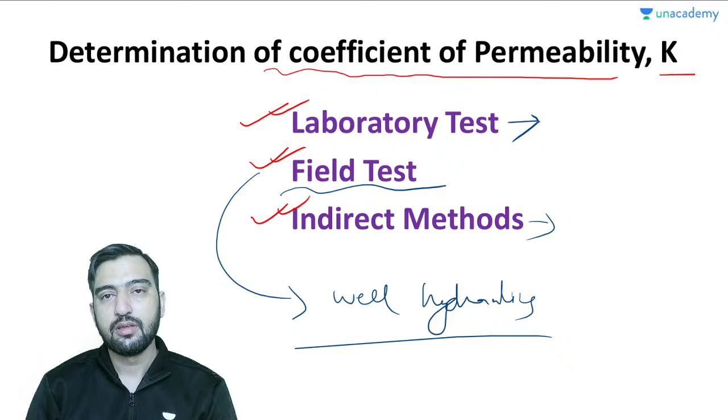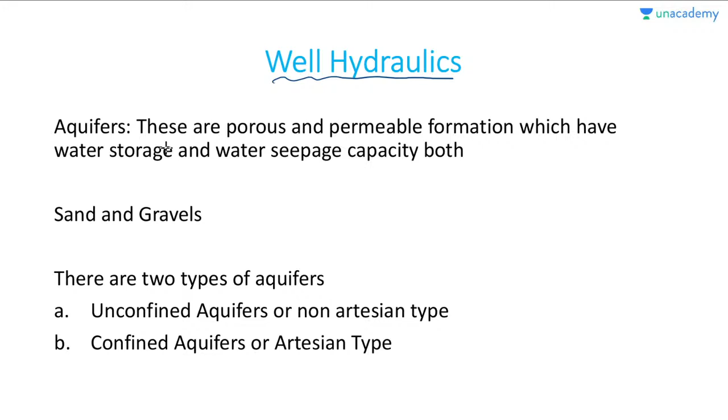So well hydraulics we were starting, and the very first definition we studied that day was aquifers. Aquifers are basically porous and permeable formations which have both water storage and water seepage capacity - permeable, so they can pass water, and porous. A best example of these are sand and gravel. There are two types of aquifer: unconfined and confined. Unconfined starts from the top and is not confined. Confined aquifer means the sand or gravel layer is sandwiched between two impermeable layers. In unconfined aquifer the pressure variation is hydrostatic, but in confined aquifer the pressure may be even higher than atmospheric pressure, higher than hydrostatic conditions.

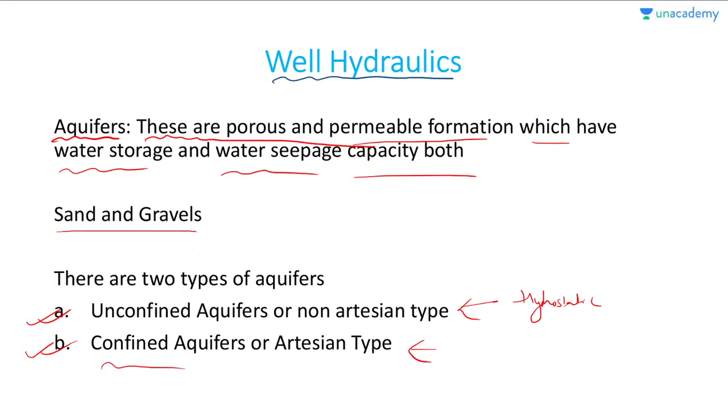Sir, can I ask a doubt? Yes David RK, of course, I am here for doubts only. Very good morning Shamala. Yes, you can ask your doubt dear, you can type it.

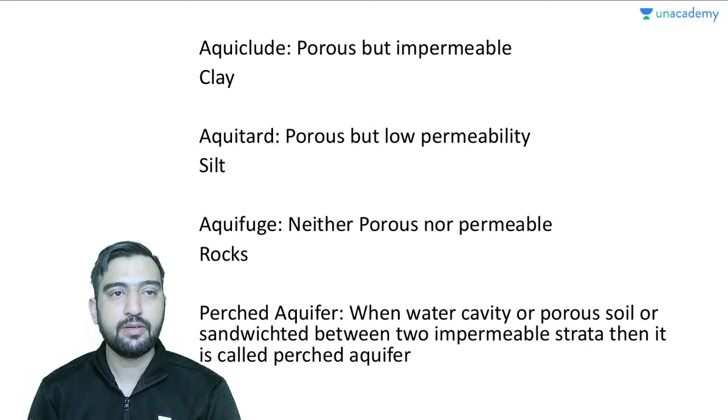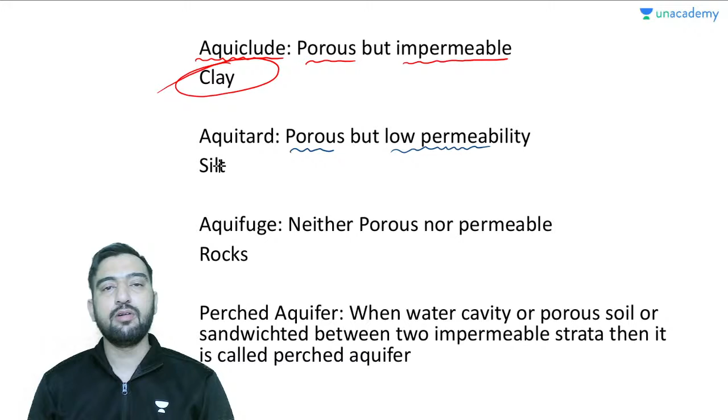Next I was saying aquiclude. What are aquicludes? Aquicludes are porous but impermeable, meaning they can retain water but will not be able to pass the water. An example is clay. Next is aquitard - aquitards can retain the water and pass the water but with very less velocity. Clay has very less velocity and silt also has less velocity, but still higher than that of clay. So for silt, the concept is very simple.

As you are increasing the particle size, your void ratio will be decreasing, but interconnectivity of the voids will be more. So permeability increases with the increase of size of the particles.

Porosity increases, you can say the soil water retention power increases with decreasing size of the particle. As we know, the sizes of clay materials are even less than 2 micron, so definitely they are going to have very large void ratio, but interconnectivity of those voids will not be there. So that is the reason why clay is considered as porous but impermeable.

Relatively, the size of silt particles is higher, up to 75 micron, so relatively they are higher than that of clay. So it's having porosity, but porosity-wise it is lesser than clay. Permeability-wise, it is greater than clay.

Aquifuge, they are rocks only, because they are neither porous nor permeable. And if we are talking about, okay, before that let me see what David is saying.

Sir, we want that void in the soil should be less, so the settlement will be less. On the other hand, in flocculated structure there are more voids but less settlement, so it is preferred.

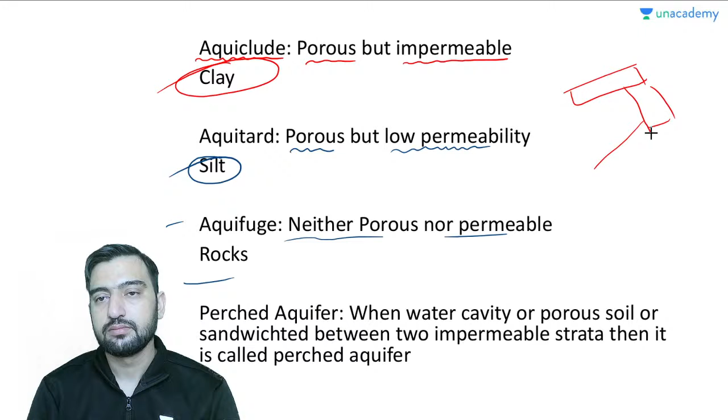Okay, so here void ratio is very high. No doubt void ratio is very high. So we do not prefer this flocculated structure. We prefer dispersed structure, dispersed soil. Okay, maybe you have studied this somewhere.

Can't say less void means less settlement? No, less void means less settlement, obviously. But most of the time, your first statement is right.

We are going to use only that soil which is having low void ratio, because low void ratio is really very good stuff for construction point of view, because settlement is less, so the ability of water to flow beneath that is also less. But it is having only one drawback, that the amount of water which is already entrapped there is going to take really long time to settle down.

Okay, but which is the reference where we have seen that you are preferring flocculated structure? Flocculated structures are good in only one thing: they are having their initial, you can say, stress very high in order to break this flocculated structure into dispersed structure.

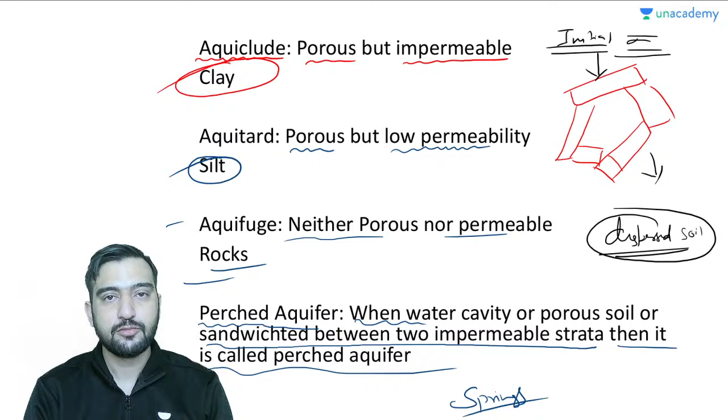Okay. Study the thing, what is the specific yield now. So till there we have seen what is the specific yield. Tell me, anybody, what is the specific yield?

Yield means, by definition, the ratio of volume of water which will flow under gravity from the saturated soil mass to the total volume of the aquifer. It means how much percentage of water can actually be transferred from a given soil sample. That is known as specific yield.

Yield means extraction power, exactly. So the ratio of volume of water which will flow under gravity from the saturated soil mass to the total volume of aquifer is known as the specific yield. You can say it is the volume of water which can be drawn under gravity with respect to total volume of the soil, expressed in percentage.

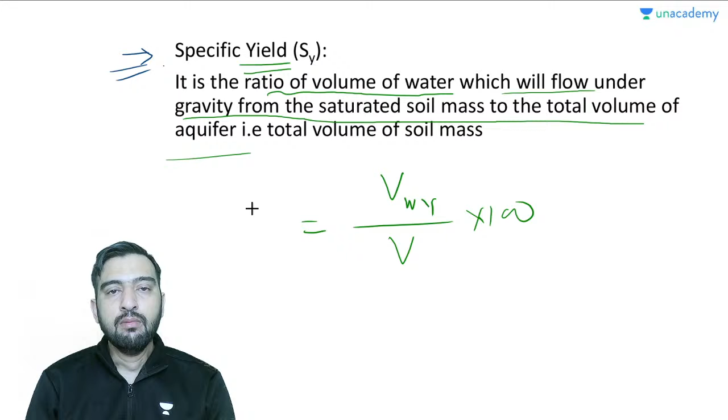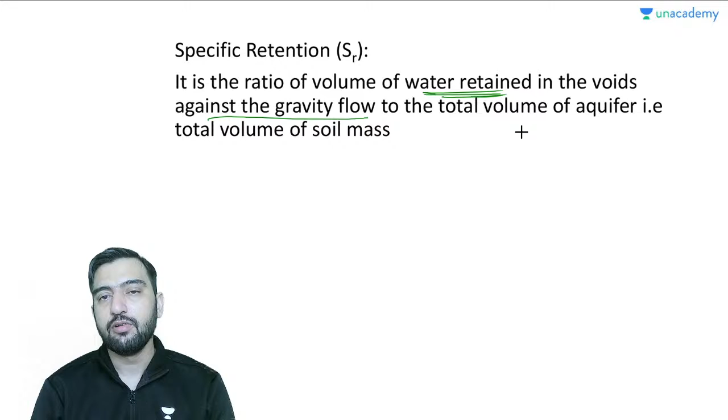What can be the complementary thing to this? It can be the specific retention. That is the volume of water which is not flowing, which is retained in the voids against gravity flow, with respect to the total volume of the aquifer or total volume of the soil mass. This is known as specific retention.

So your specific retention is equal to VWR over V into 100.

So one thing you can observe, sir, is yield due to gravity or due to external applied force like bore wells or other processes.

Actually, in definition it is gravity only. But one thing is sure: if specific yield of a soil is good, then due to boreholes, external tube wells or pumping, it is also going to be more, because gravity simply acts with its own force with the help of the gravity component. If that yielding is more, then indirectly, whenever you do any pumping, still the yield would be higher. But in definition, specific yield only includes due to gravity. However, it is also true that if specific yield due to gravity is high, then automatically its water extraction capacity will also be high.

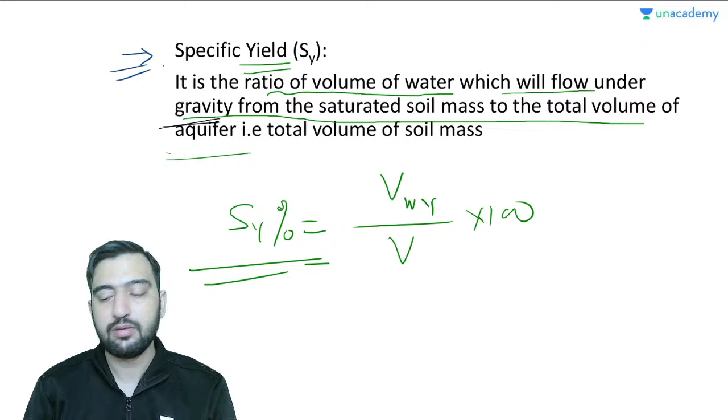So one observation I can draw from here: if I add total yield plus total retention, it is volume of water yielded plus volume of water retained, upon total volume. So whatever water has been flowing and whatever water has been retained, together they are covering what volume?

So if you add your yield and retention, in percentage, it is going to be equal to the porosity. Tell me if I am right or not. Then total it is going to be equal to porosity percentage.

Because, see, whatever water is flowing and whatever water is retained for a saturated condition, that is nothing but the volume of void, and we know that volume of void with respect to total volume is nothing but the porosity. So in percentage it is porosity. Is it clear?

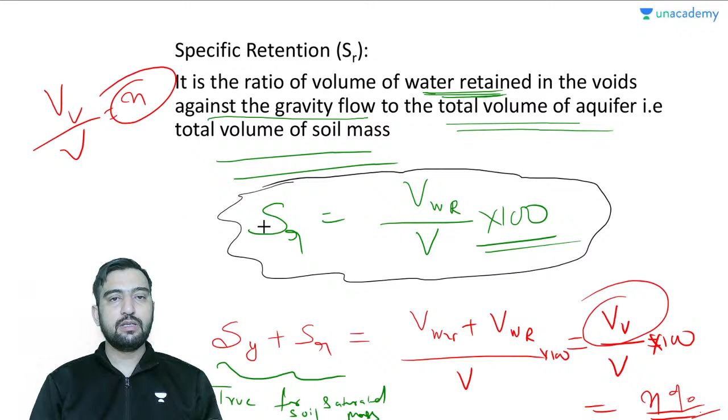Okay, now see the next one: storage coefficient. What is storage coefficient? It is simply the volume of water in a confined aquifer which is released per unit surface area and per unit change in head. So once again, the amount of water which can be extracted per unit surface area and per unit change in head is known as your storage coefficient. Is it clear? Definition is important, and the symbol for this is capital A.

Storage coefficient symbol is given by capital A. And on field, how can we find the storage coefficient? We can obtain it at field by pumping test, that too in confined aquifer. Pumping test in confined aquifer. So by that, you guys can get the storage coefficient.

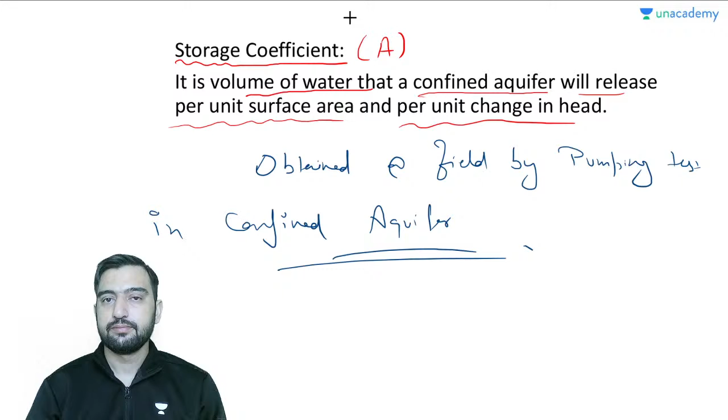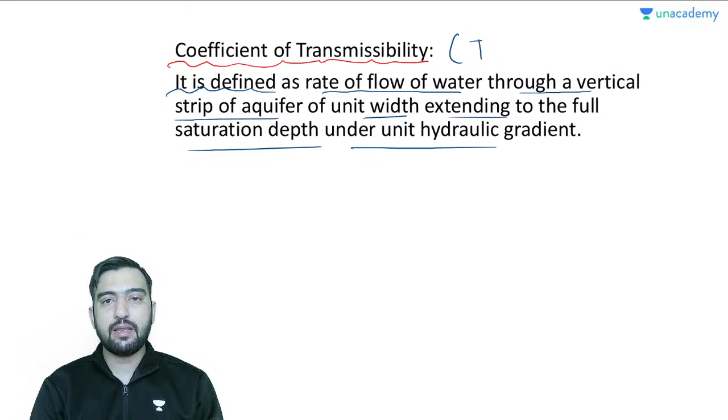Okay, let's move to next: coefficient of transmissibility. It is defined as the rate of flow of water through a vertical strip of aquifer of unit width, extending to full saturated depth, under unit hydraulic gradient. In simple language, coefficient of transmissibility, denoted by T, is simply your hydraulic conductivity or coefficient of permeability multiplied by the height.

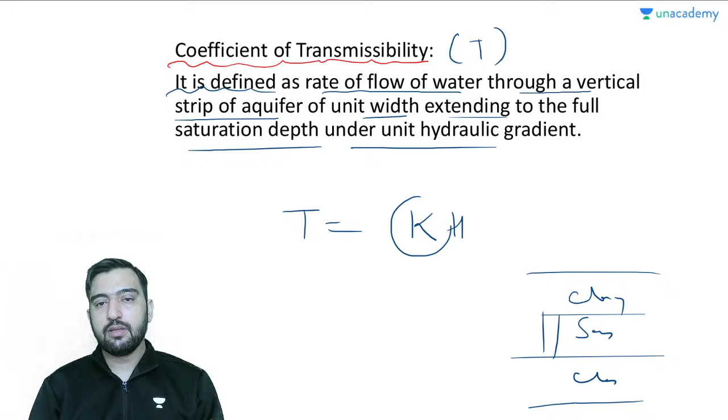For example, if this is my clay and sand, suppose it is my aquifer, so this K value, whenever you are multiplying it with this B, then this is known as your coefficient of transmissibility. So simply you can say that on multiplying your coefficient of permeability with the height or depth of the layer, you will be getting your T value, coefficient of transmissibility.

And here my dear friend, B or you can say H is going to be the depth or height of the aquifer. So it's very easy to find. All we have to calculate is the K value, and after that we have to simply multiply that K value with our B. Is it clear? So once again I am reading the definition. It is defined as the rate of flow of water through a vertical strip of unit width extending to full saturation depth under unit hydraulic gradient. Okay, so that is the case.

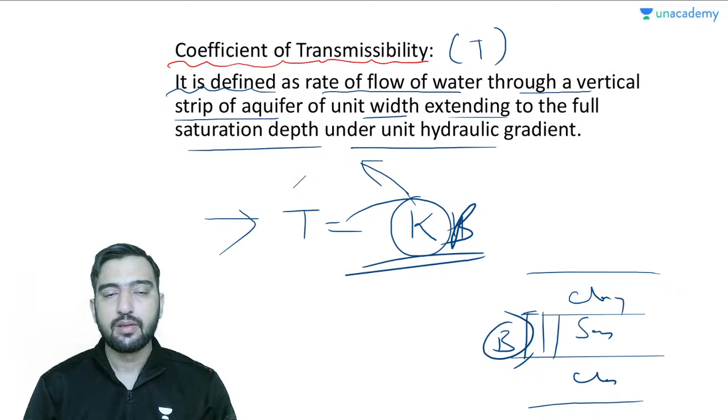Now it's time to calculate all these stuffs one by one. So it's analysis of unconfined aquifer. As I have told you in the previous class and today's class also, there are two types of aquifer: unconfined and confined. In an unconfined aquifer, you cannot say anything about the confinement, you cannot say about the depth.

But in a confined aquifer, your sand or gravel layer, your aquifer, is simply sandwiched between two aquicludes or two impermeable layers, and its depth is fixed and confinement is there. So there are two theories for these analyses, for unconfined as well as for confined. One is Theim's theory and one is Dupuit's theory. We will be studying Theim's theory, and we will be able to observe that Dupuit's theory is nothing but a special case of Theim's theory, or you can say Theim's theory is the more advanced version of the analysis. Doesn't matter whether it is a case of unconfined aquifer or confined aquifer.

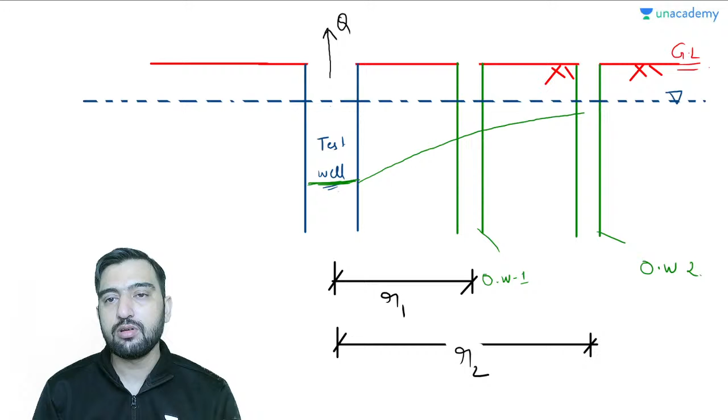Now what will happen? A drawdown curve will be established, on this side as well as that side; it would be symmetrical, obviously. So due to this pumping, the water level in both of these observation wells would be lowered, isn't it? So there are certain assumptions before I actually start the analysis. What are those assumptions? First of all, we will see that.

The first assumption is that the test well penetrates the entire thickness of the aquifer. That is, no flow from the base of the well and flow is radial. Although this aquifer is unconfined, so its thickness is going to be very deep. And if it is very deep, then water may enter my well from here, and since it is an unconfined aquifer and the well is only of limited extent, water may also be entering from the bottom.

This is the reality. But Theim said we are assuming that where our well has stopped, that is also the end of the aquifer, meaning water is not going to come from below. In short, Theim said that water flow would be only radial, not from the base. So he has simply ignored this water coming from below. As per his analysis, only radial flow is going to be considered.

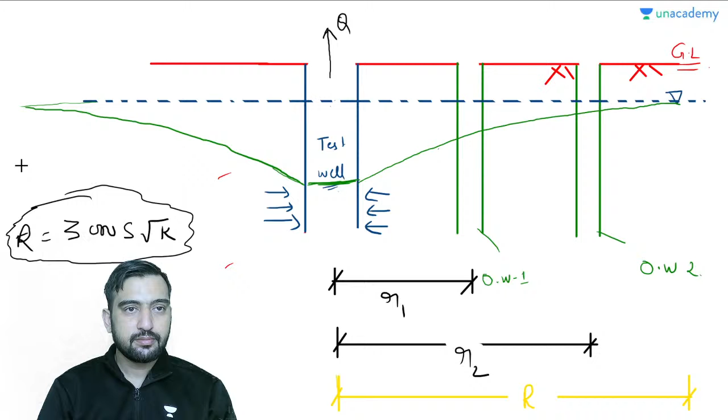But it is an empirical equation. It is given by Sichardt. So let me write. It is Sichardt's equation, where K is the coefficient of permeability in meter per second, and S is the drawdown. And this R is the radius of influence.

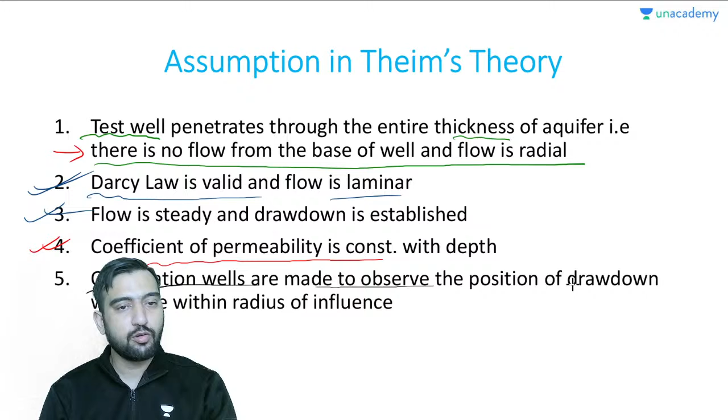I hope till here everything is clear. R is known as the radius of influence. So these two observation wells are made to observe the position of drawdown, which must lie within the radius of influence, because beyond the radius of influence, drawdown would not be established. See, this is drawdown at observation well 1. This is drawdown at observation well 2.

Okay, I am hiding this. So see this. Observation wells are made to observe the position of drawdown which lies within the radius of influence. I noticed in my device that I was blocking the statement, so that's why I have now removed myself. Okay, great. So you can see it. So see now.

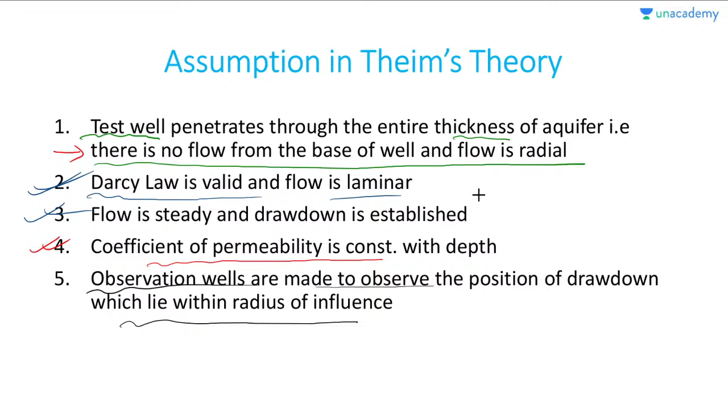So here it is the maximum drawdown, because from here you are pumping the water. This is your test well and this is your maximum drawdown. Let's say this is the drawdown in observation well number 1, S1. This is your drawdown here, S2. So this is R1, radius of observation well 1, and R2, radius of observation well 2, and this R is the radius of influence, the zone after which your initial water level is maintained.

Anyway, if you are going to take out water from a tube well or test well, it is going to influence the surrounding water only. Okay, so now you can see the water is coming from here. And if you are considering this thing, then here the water would be entering. See, it is just like your cylinder now.

See, this is your center, and this is going to be like this, and for water to come inside, you would be having these things. The same thing would happen radially. So if you have to consider the area which is actually available for flow to come in, that is nothing but the circumferential area of this cylinder, and not with full depth, but only up to the depth where you can find the water.

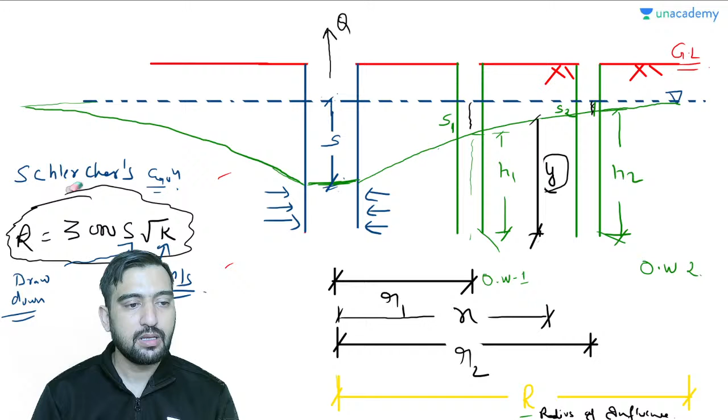Yeah, so you can always ask your doubt here.

So y be the height at any distance x. So what is the area which is available for inflow? It is 2 pi x into y. Tell me if I am wrong. What is 2 pi x? This is x and this is y. So this is a cylinder, so the circumferential area available at radial distance x would be 2 pi x into y. So from this much of area, water is going to come under the gravity flow.

After that we all know that Q is equal to KIA. This is nothing but Darcy's law. So Q is equal to K, I is dy by dx, and A. Our task is to determine this value. But before this, we can simply find the discharge for a small element. So Q is equal to K dy by dx, and the area is 2 pi x into y.

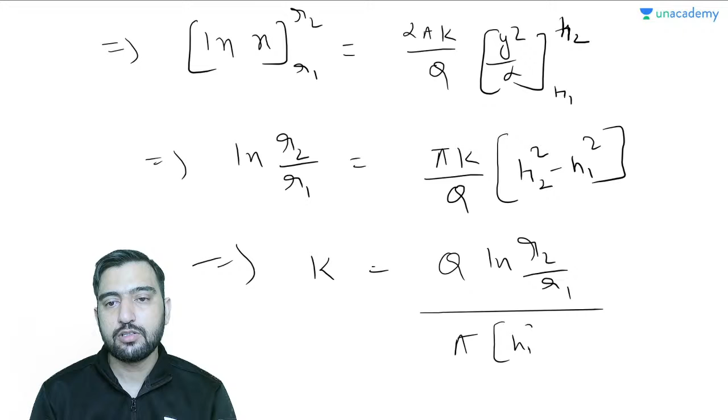So ln r2 over r1 is equal to pi K over Q into h2 square minus h1 square. So K is equal to Q ln r2 over r1 over pi into h2 square minus h1 square.

Is it clear? So this is the expression, or if you want to write it in log base 10, it is 2.303 Q log10 r2 over r1 divided by pi into h2 square minus h1 square. That's all. So that is going to be the concept. Let me write it here only, I'm just trying to increase the visibility.

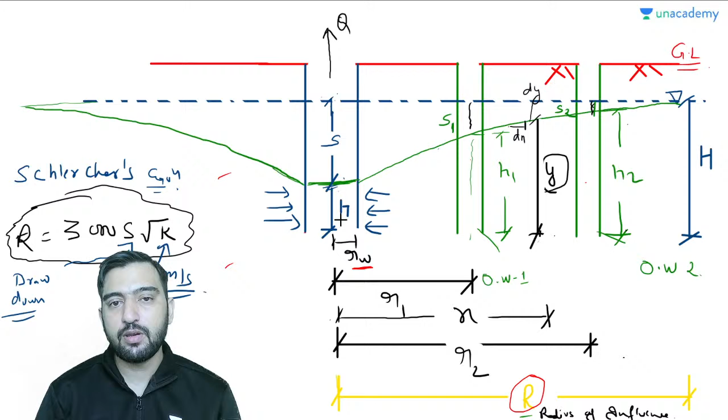And similarly, the Dupid formula is going to be K is equal to 2.303, same thing, Dupid is simply replacing R2 by capital R and R1 by radius of the well, upon 2 pi B into H minus small h. H minus small h is also known as your drawdown at the test well. Is it clear?

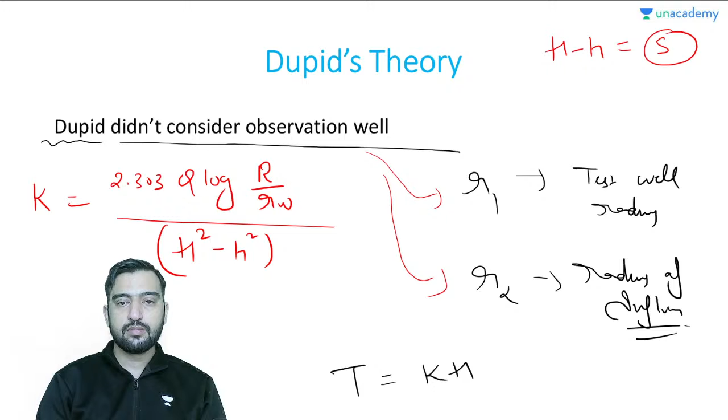So transmissibility you guys can also find. If K is known to you, transmissibility is simply equal to K times H, or you can say K times B. And here as well, your transmissibility is equal to K times B, where B is the thickness of the aquifer, my dear friend. Is it clear?

So, is it clear to all of you? If it is a matter of confined aquifer, then this is the formula. You must remember this, because this you can obtain from the special case only.

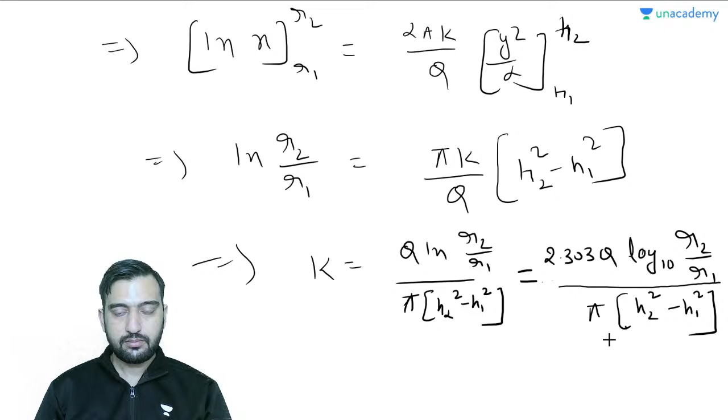For unconfined, the numerator is same: 2.303 Q log R2 over R1. Only the difference is in the denominator. Here it's pi H2 square minus H1 square, and here 2 pi B capital H minus small h, like this. Is it clear? So like this we can analyze our confined aquifer.

Other than these two broadly used field tests, we have several more tests.

I want to tell you, based on this, you got a question this time in GATE. I have also done this in my analysis session, and there I have also done this K value thing, so you can watch that. So you can see some more test results, or some more tests.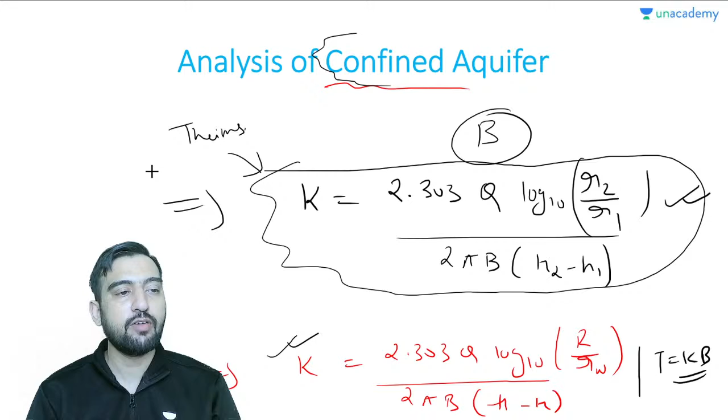So these are some more famous tests, but they are not important from our exam point of view. And this confined and unconfined analysis was really very important. I hope you got this. My dear friend, let's keep up to here only. Today's session was really very important because we have seen the analysis of confined as well as unconfined aquifer. So in confined and unconfined aquifer, I have tried one case.

Then second case is the special case of Dupuit. Then third is instead of variable height y, your height of entrance is every time b. So based on that, you are calculating those things. So guys, it is a complete package to crack GATE and ESE.